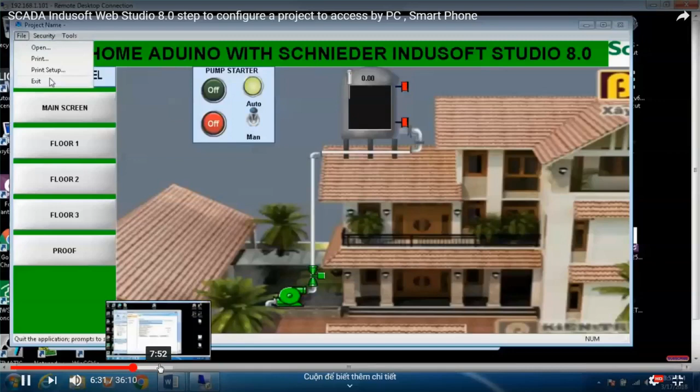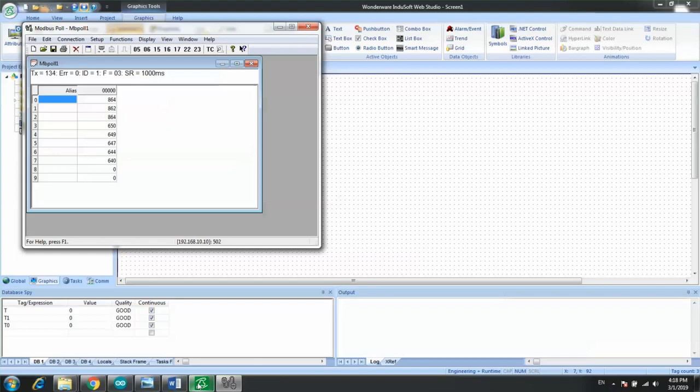With HART, the analog 4 to 20 milliamp signal and the digital HART protocol are both available to the control system and instrument technician. If a sensor loop is upgraded from analog only to analog plus HART, the control system programming and configuration for the measurement value can stay the same.

You can imagine that superimposing an AC signal on top of a DC signal might interfere with the 4 to 20 milliamp signal, but this is not the case. The AC HART sine wave oscillates at either 1200 Hz for a 1 value or at 2200 Hz for a 0 value. The amplitude of the AC sine wave remains the same, and for every oscillation, the amplitude of the first half of each sine wave above the DC current curve exactly equals the amplitude of the second half of each sine wave below the DC current. The net effect of the sine wave is then 0.

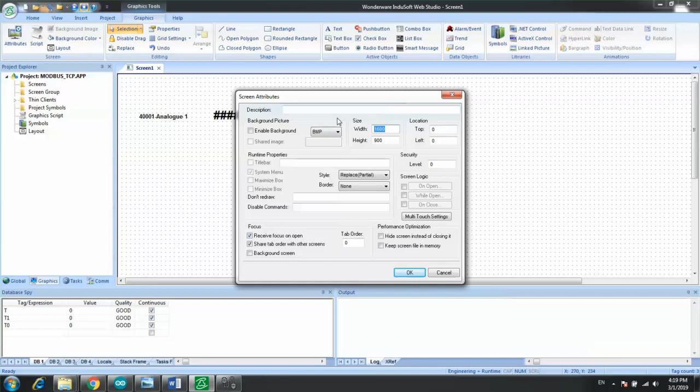So, the analog value of the sensor measurement data is not affected by the HART signal, just as a telephone voice conversation is not affected by the caller ID signal using the same Bell 202 protocol.

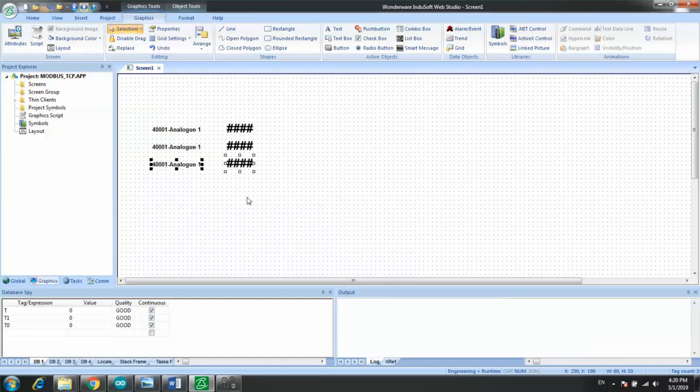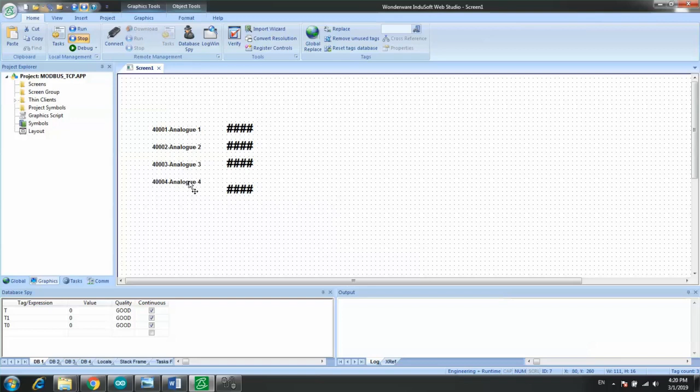Each HART device is capable of sending and receiving 35 to 50 different information items, including the process variable, that is the same measurement value as provided by the 4 to 20 milliamp analog signal, device status, diagnostic alerts, like sensor value under range, basic configuration parameters, like upper and lower range limits, and the tag name of the device. HART is a perfect choice for multivariable instruments, like mass flow meters, where mass flow, volumetric flow, temperature, and density can all be communicated to the control system over a single cable.

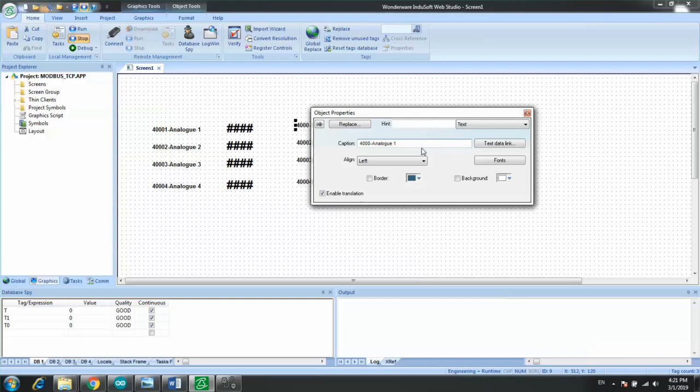The HART protocol is governed by a vendor-independent association, the HART Communication Foundation, so HART sensors from any manufacturer can be interchanged with those of other manufacturers. This makes implementation, maintenance, and troubleshooting very easy. Also, HART is used extensively for final control devices, such as control valve positioners, with the same benefits and diagnostic capabilities.

Even though the HART standard requires manufacturers to provide a minimum number of specific data items with every HART sensor, vendors can also extend the data set to include vendor-specific items, like sensor model numbers, or firmware versions or advanced diagnostic counters. In order for the control system to recognize the type and values for these custom data, a special description file called a device description or DD file is required. This file is loaded on the DCS or PLC configuration station or downloaded to the handheld communicator and becomes directly associated to the sensor. This file simply allows the data stream from the sensor to be correctly parsed or interpreted and allow the technician or engineer to make the correct requests for sensor data.

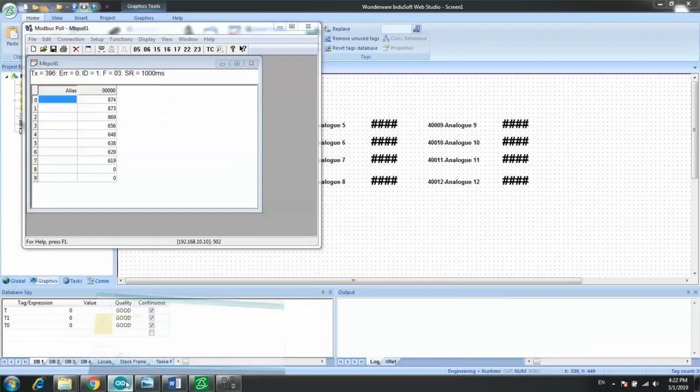To review, HART is a digital data communication protocol that is layered on top of a traditional analog 4 to 20 milliamp signal, which provides advanced data retrieval and configuration options to be executed remotely from a DCS or PLC system, or from a handheld communicator. HART communicates over a single pair of wires, so adding HART to an existing 4 to 20 milliamp sensor loop requires no wiring modification. Only the hardware at the analog input card and the sensor electronics may need to be upgraded so that the HART functionality is provided.

A high percentage of sensors already installed in 4 to 20 milliamp loops are already HART enabled. HART may be the field bus you already have in your plant. Through simple configuration, a wealth of new process data and diagnostic capability can be obtained with a minimum of effort and expense.

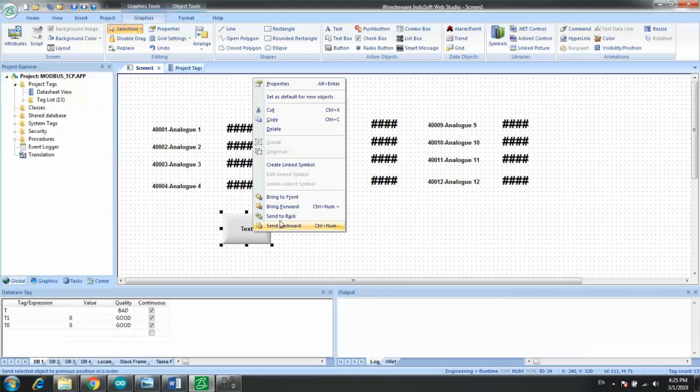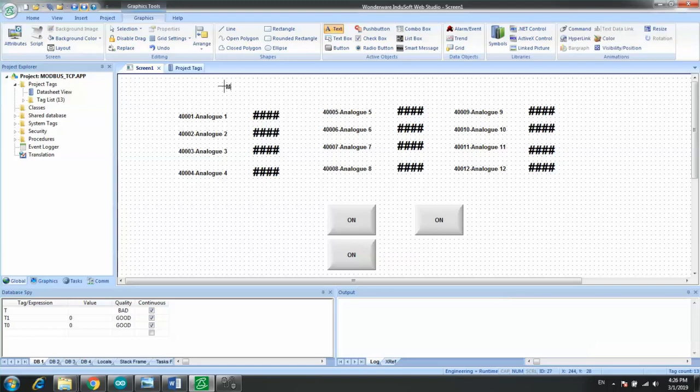In this lesson, we will discuss what a servo motor is and how it works. So let's first determine what a servo motor is and examine some unique features of the types of a servo motor and its application. Servo Motor Basics. Let's begin with the servo motor basics. Servo motors are part of a closed-loop system and are comprised of several parts, namely a control circuit, servo motor, shaft, amplifier, and either an encoder or resolver.

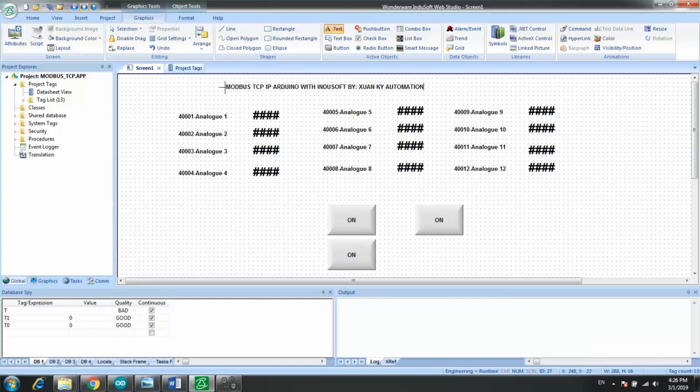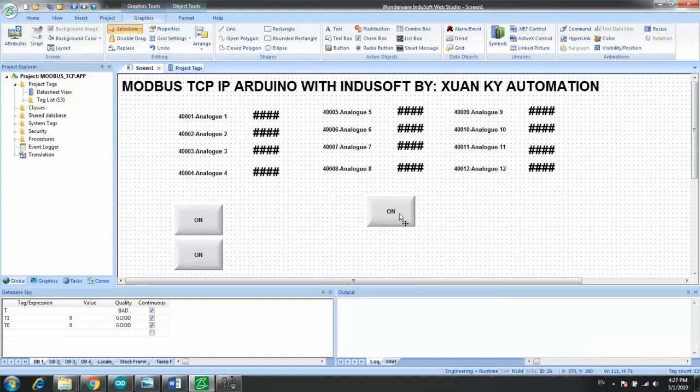A servo motor is a self-contained electrical device that rotates parts of a machine with high efficiency and with great precision. The output shaft of this motor can be moved to a particular angle, position, and velocity that a regular motor does not have. The servo motor utilizes a regular motor and couples it with a sensor for positional feedback. The controller is the most important part of the servo motor, designed and used specifically for this purpose.

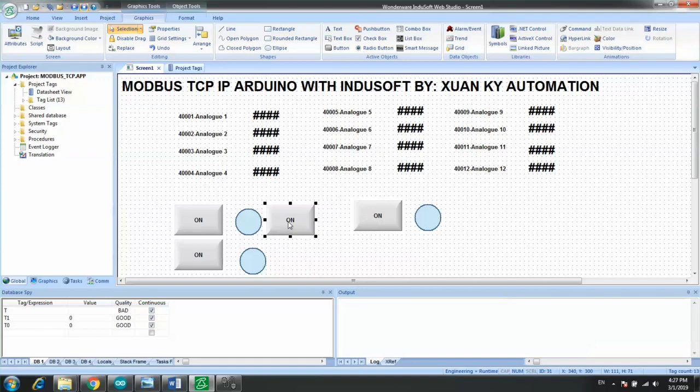The servo motor is a closed-loop mechanism that incorporates positional feedback in order to control the rotational or linear speed and position. The motor is controlled with an electric signal, either analog or digital, which determines the amount of movement, which represents the final command position for the shaft. A type of encoder serves as a sensor, providing speed and position feedback. This circuitry is built right inside the motor housing, which usually is fitted with a gear system.

Types of servo motors are classified into different types based on their application, such as the AC servo motor and DC servo motor. There are three main considerations to evaluate servo motors. First, based on their current type, AC or DC, and secondly, on the type of commutation used, whether the motor uses brushes, and the third type of consideration is the motor's rotating field, the rotor, whether the rotation is synchronous or asynchronous. Let's discuss the first servo consideration.

AC or DC consideration is the most basic classification of a motor based on the type of current it will use. Looking at it from a performance standpoint, the primary difference between AC and DC motors is in the inherent ability to control speed. With a DC motor, the speed is directly proportional to the supply voltage with a constant load. And in an AC motor, speed is determined by the frequency of the applied voltage and the number of magnetic poles. While both AC and DC motors are used in servo systems, AC motors will withstand higher current and are more commonly used in servo applications such as with robots, inline manufacturing, and other industrial applications where high repetitions and high precision are required.

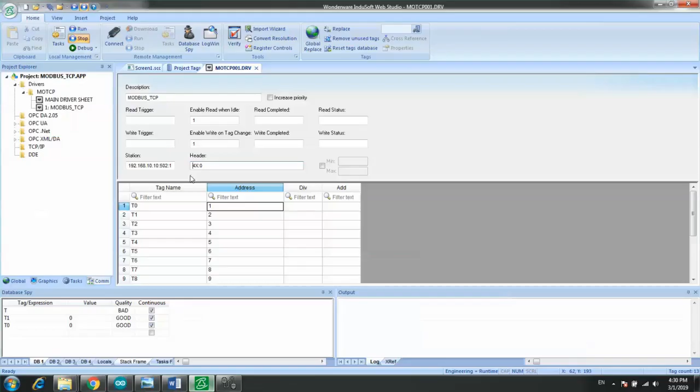While the majority of motors used in servo systems are AC brushless designs, brushed permanent magnet DC motors are sometimes employed as servo motors for their simplicity and low cost. The most common type of brushed DC motor used in servo applications is the permanent magnet DC motor. Brushless DC motors replace the physical brushes and commutator with an electronic means of achieving commutation, typically through the use of Hall effect sensors or an encoder. AC motors are generally brushless, although there are some designs, such as the universal motor, which can run on either AC or DC power, that do have brushes and are mechanically commutated.

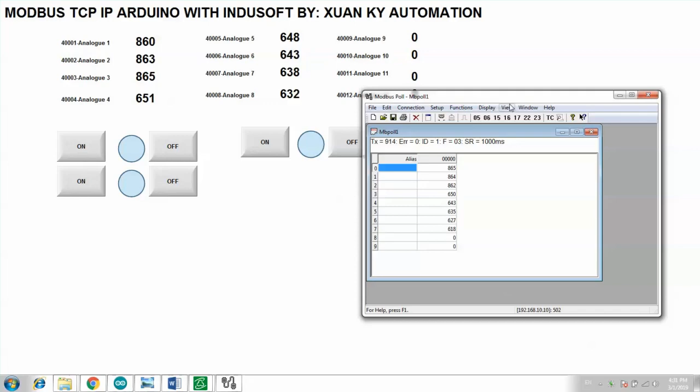And the final classification to consider is whether the servo motor application will use a synchronous or asynchronous rotating field. While DC motors are generally categorized as brushed or brushless, AC motors are more often differentiated by the speed of their rotating synchronous or asynchronous field.

If we recall from the AC-DC consideration that in an AC motor, speed is determined by the frequency of the supply voltage and the number of magnetic poles. This speed is referred to as the synchronous speed. Therefore, in a synchronous motor, the rotor rotates at the same speed as the stator's rotating magnetic field.

However, in an asynchronous motor, normally referred to as an induction motor, the rotor rotates at a speed slower than the stator's rotating magnetic field. However, the speed of an asynchronous motor can be varied utilizing several control methods, such as changing the number of poles and changing the frequency, just to name a couple.

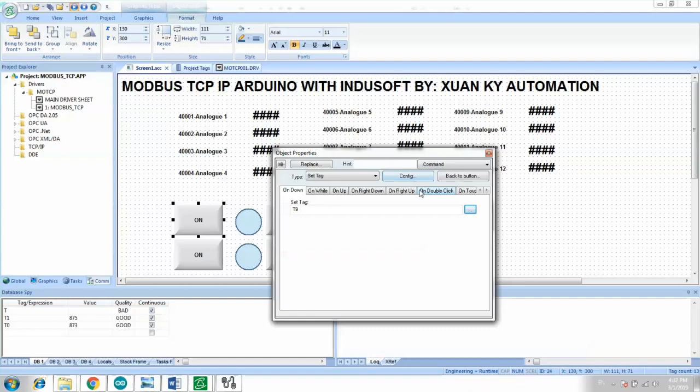The working principles of a DC servo motor are the construction of four major components: a DC motor, a position sensing device, a gear assembly, and control circuit. The desired speed of the DC motor is based on the voltage applied. In order to control the motor speed, a potentiometer produces a voltage which is applied as one of the inputs

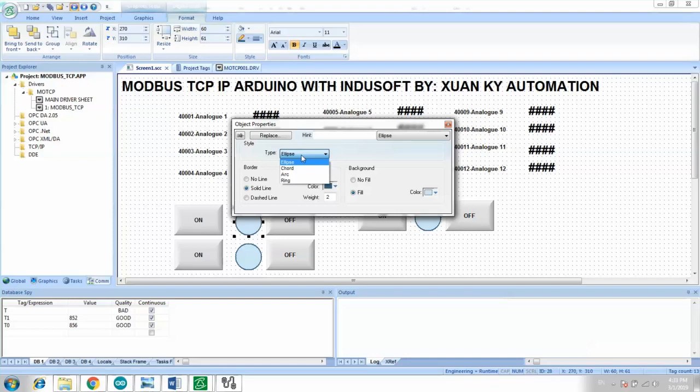to the error amplifier. In some circuits, a control pulse is used to produce DC reference voltage corresponding to desired position or speed of the motor, and it is applied to a pulse width voltage converter. The length of the pulse decides the voltage applied at the error amplifier as a desired voltage to produce the desired speed or position. For digital control, a PLC or other motion controller is used for generating the pulses in terms of duty cycles to produce more accurate control.

The feedback signal sensor is normally a potentiometer that produces a voltage corresponding to the absolute angle of the motor shaft through the gear mechanism. Then, the feedback voltage value is applied at the input of the error comparator amplifier. The amplifier compares the voltage generated from the current position of the motor, resulting from the potentiometer feedback, to the desired position of the motor, producing an error of either a positive or negative voltage.

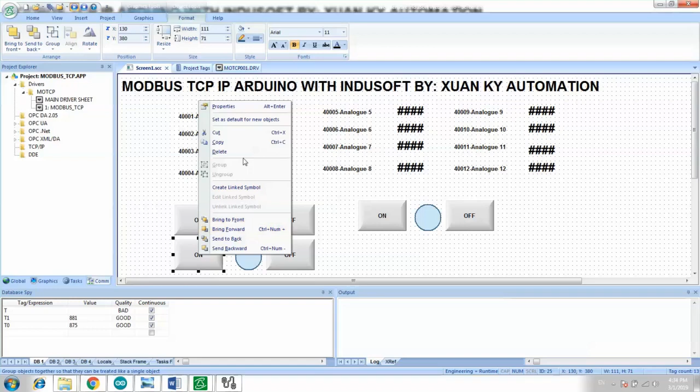This error voltage is applied to the armature of the motor. As the error increases, so does the output voltage applied to the motor armature. As long as error exists, the comparator amplifier amplifies the error voltage and correspondingly powers the armature. The motor rotates until the error becomes 0. If the error is negative, the armature voltage reverses, and hence the armature rotates in the opposite direction.

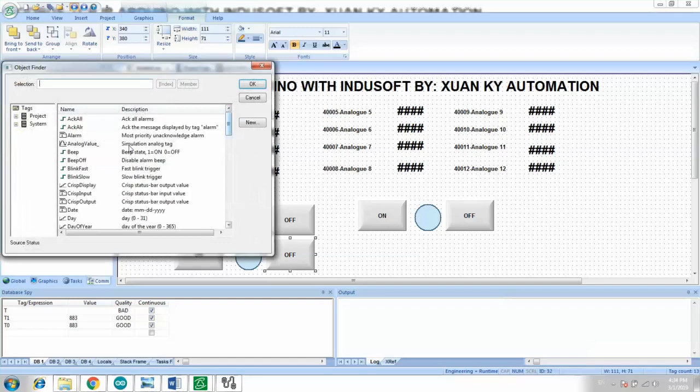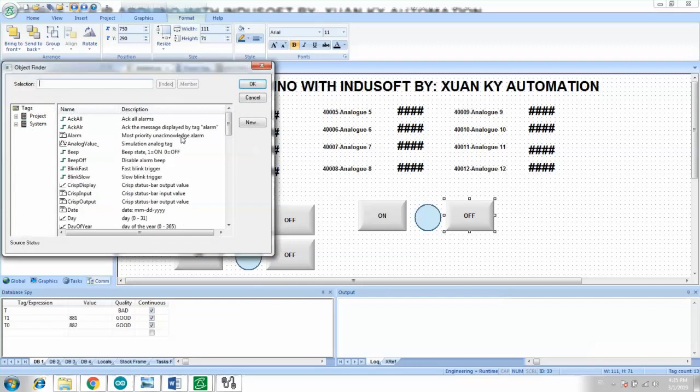The working principles of an AC servo motor are based on the construction with two distinct types of AC servo motors. They are synchronous and asynchronous, or induction. The synchronous AC servo motor consists of a stator and rotor. The stator consists of a cylindrical frame and stator core. The armature coil is wound around the stator core, and the coil is connected to a lead wire through which current is provided to the motor.

The rotor consists of a permanent magnet, and this differs with the asynchronous induction type rotor in that the current in the rotor is induced by electromagnetism, and therefore these types are called brushless servo motors. When the stator field is excited with voltage, the rotor follows the rotating magnetic field of the stator at the same speed, or synchronized with the excited field of the stator. And this is where the synchronous type is derived. With this permanent magnet rotor, no rotor current is required.

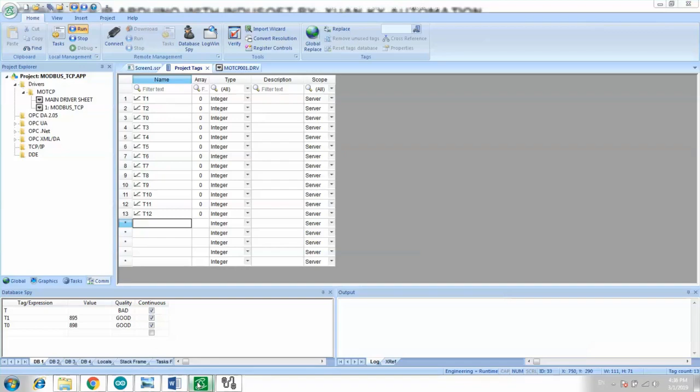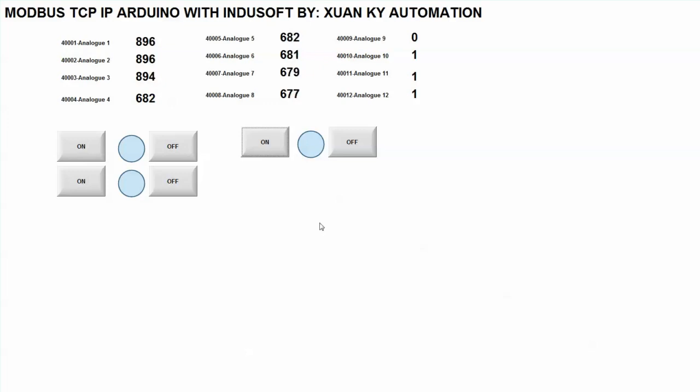The asynchronous or induction AC servo motor stator consists of stator core, armature winding, and lead wire, and the rotor consists of shaft and the rotor core winding. Most induction motors contain a rotational element, the rotor or squirrel cage. Only the stator winding is fed with an AC supply. Alternating flux field is produced around the stator winding with the AC supply. This alternating flux field revolves with synchronous speed.